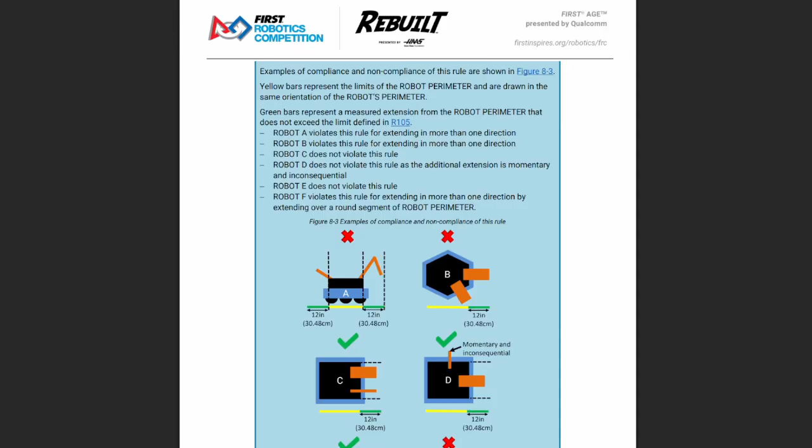Blue box. Examples of momentary and inconsequential actions include a wire or cable tie swinging out of the robot perimeter, including while an extension is deployed out a different side. Examples of compliance and non-compliance of this rule are shown in Figure 8-3. Yellow bars represent the limits of the robot perimeter and are drawn in the same orientation of the robot's perimeter. Green bars represent a measured extension from the robot perimeter that does not exceed the limits defined in R105.

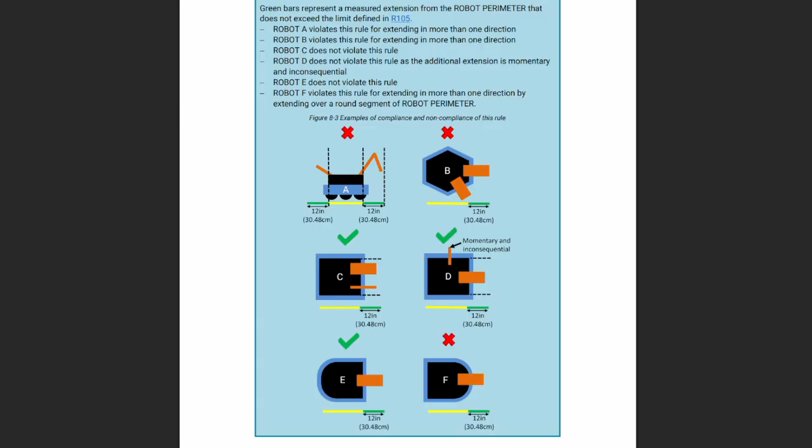Robot A violates this rule for extending in more than one direction. Robot B violates this rule for extending in more than one direction. Robot C does not violate this rule. Robot D does not violate this rule as the additional extension is momentary and inconsequential. Robot E does not violate this rule. Robot F violates this rule for extending in more than one direction by extending over a round segment of robot perimeter.

R107. Robot vertical extension limit. Robots may not extend such that their total height exceeds 30 inches. Blue box. This measurement is intended to be made as if the robot is resting on a flat floor without changing the robot configuration, not relative to the current height of the robot from the field carpet at any given time, i.e., the measurement is made perpendicular to the robot perimeter polygon.

R108. Robot extension floor interaction. Robot extensions may not interact with the carpet, bumps, or tower base such that the bumpers are lifted out of the bumper zone. See R405.

8.2. Robot safety and damage prevention. R201: No digging into carpet.

Traction devices must not have surface features that could damage the arena, e.g. metal, sandpaper, inflexible studs, cleats, hook loop fasteners, or similar attachments. Traction devices include all parts of the robot designed to transmit any propulsive and/or braking forces between the robot and field carpet.

R202: No exposed sharp edges. Protrusions from the robot and exposed surfaces shall not pose hazard to the arena elements, including scoring elements or people. Note that acrylic or other materials which may break into jagged pieces is not explicitly prohibited, but any such breakage must be corrected immediately to comply with this rule.

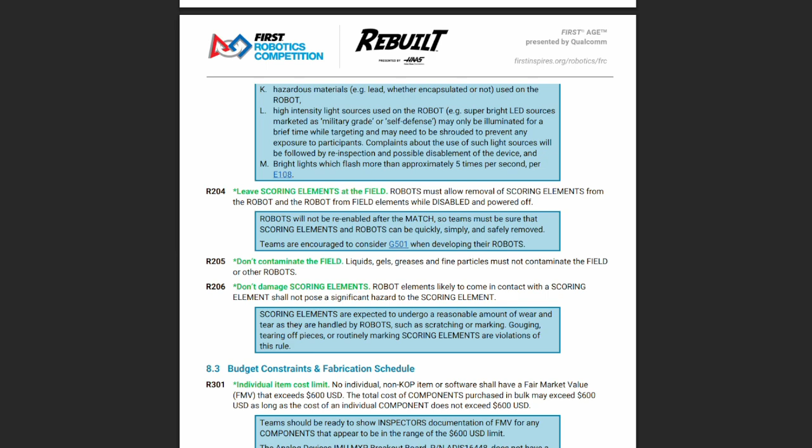R206: Don't damage scoring elements. Robot elements likely to come in contact with a scoring element shall not pose a significant hazard to the scoring element. Scoring elements are expected to undergo a reasonable amount of wear and tear as they are handled by robots, such as scratching or marking. Gouging, tearing off pieces, or routinely marking scoring elements are violations of this rule.

8.3. Budget constraints and fabrication schedule. R301: Individual item cost limit.

No individual, non-KOP item or software shall have a fair market value (FMV) that exceeds $600 US. The total cost of components purchased in bulk may exceed $600 US as long as the cost of an individual component does not exceed $600 USD.

Teams should be ready to show inspectors documentation of fair market value for any components that appear to be in the range of the $600 USD limit. The Analog Devices IMU MXP Breakout Board, part number ADIS 16448, does not have a published fair market value. This device is considered to comply with this rule regardless of its true fair market value.

The FMV, or fair market value, of a COTS item is its price defined by a vendor for the part or an identical functional replacement. This price must be generally available to all FIRST Robotics Competition teams throughout the build and competition season, i.e., short-term sale prices or coupons do not reflect FMV.

However, teams are only expected to make a good faith effort at determining the item price and are not expected to monitor prices of robot items throughout the season. The FMV is the cost of the item itself and does not include any duties, tariffs, taxes, shipping, or other costs that may vary by locality.

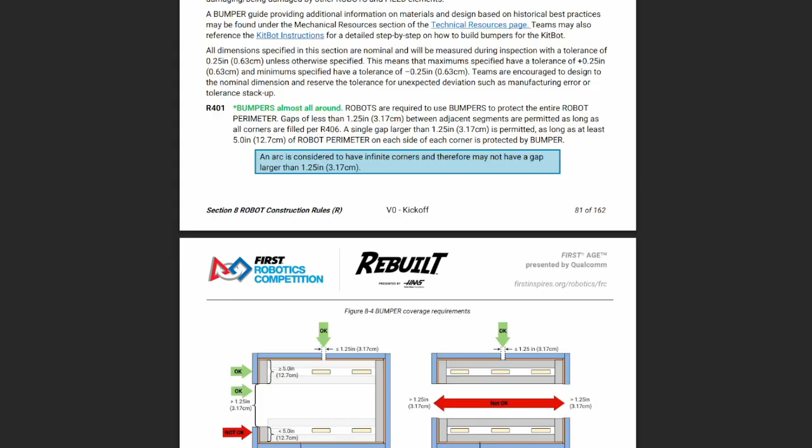An arc is considered to have infinite corners, and therefore it may not have a gap larger than 1.25 inches.

R402: bumper construction. Bumpers must consist of the following. A. Padding: a minimum of 2.25 inches depth of foam padding, at least 4.5 inches tall, consisting of solid blocks, sheets, or stacked rods of one or more of the following materials: solid pool noodles or backer rod; solid polyethylene closed-cell foam, including cross-linked, with density between 1.5 and 3 pounds per cubic foot; solid EVA closed-cell foam with density between 2 and 6 pounds per cubic foot; and foam floor tiles. Multiple types, shapes, and/or layers of foam may be used within a single bumper.

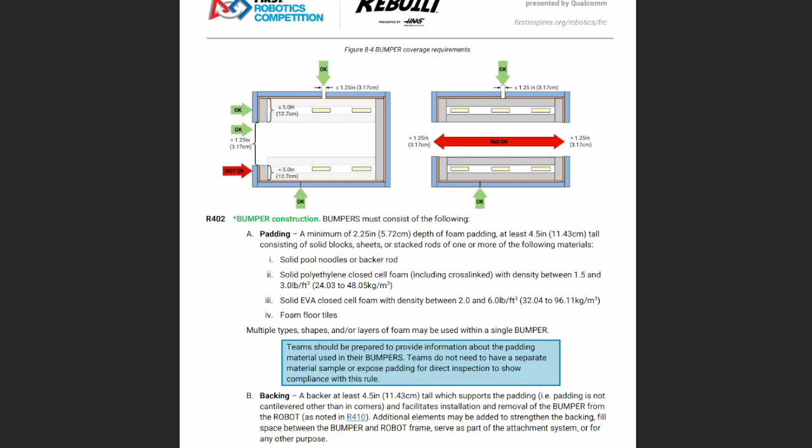Teams should be prepared to provide information about the padding material used in their bumpers. Teams do not need to have a separate material sample or expose padding for direct inspection to show compliance with this rule.

B. Backing: a backer at least 4.5 inches tall, which supports the padding, i.e. the padding is not cantilevered other than in corners, and facilitates installation and removal of the bumper from the robot, as noted in R410. Additional elements may be added to strengthen the backing, fill space between the bumper and robot frame, serve as part of the attachment system, or for any other purpose.

C. Cover cloth, as noted in R411, covers all outward, upward, and downward facing surfaces of padding such that no padding is exposed to interaction with the field or other robots.

D. Fastening system. Bumpers must attach to the robot perimeter with a rigid fastening system to form a tight, robust connection to the main structure or frame, e.g. not attached with hook and loop tape or cable ties. The fastening system must be designed to withstand vigorous gameplay. All removable fasteners, e.g. bolts, locking pins, quick-release pins, etc., may be considered part of either the bumpers or robot for determination of weight per R103 and R408.

Blue box. The bumper rules provide teams significant freedom in choosing designs and materials. For information on reference designs, see the bumper guide under the Mechanical Resources section of the Technical Resources page.

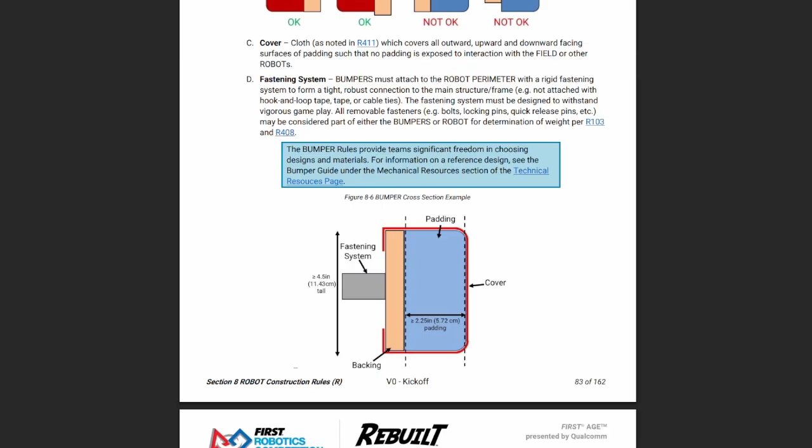R403, Bumper Extension Limit. Bumpers must not extend more than 4 inches from the robot perimeter.

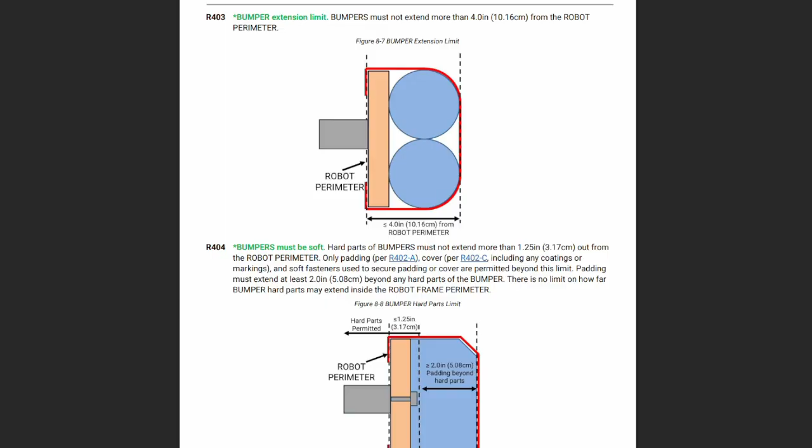R404, bumpers must be soft. Hard parts of bumpers must not extend more than 1 1/4 inches out from the robot perimeter. Only padding per R402A, cover per R402C, including any coatings or markings, and soft fasteners used to secure padding or cover are permitted beyond this limit. Padding must extend at least 2 inches beyond any hard parts of the bumper. There is no limit on how far bumper hard parts may extend inside the robot frame perimeter.

Blue box. Hard parts include any items which are likely to cause damage to the cloth or padding of other bumpers, such as nuts and bolts, cable ties, hard plastic, etc.

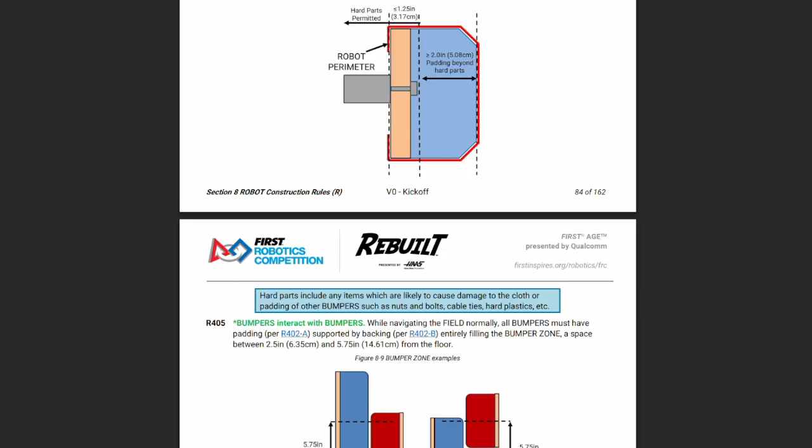R405. Bumpers interact with bumpers. While navigating the field normally, all bumpers must have padding per R402A, supported by backing per R402B, entirely filling the bumper zone, a space between 2.5 inches and 5.75 inches from the floor.

Blue box. This measurement is intended to be made in a robot's expected configuration or configurations while navigating the field and is relative to whatever surface the robot is currently driving on. Bumpers leaving the bumper zone due to robots inadvertently tipping is not a violation of this rule.

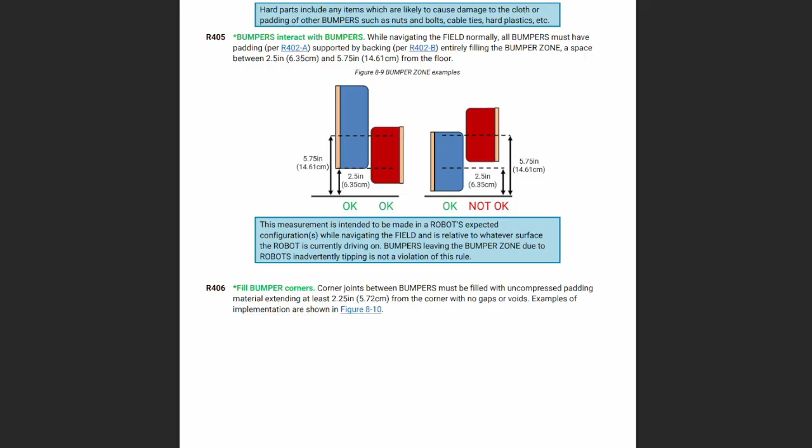R406. Fill bumper corners. Corner joints between bumpers must be filled with uncompressed padding material extending at least 2.25 inches from the corner with no gaps or voids. Examples of implementation are shown in Figure 8-10.

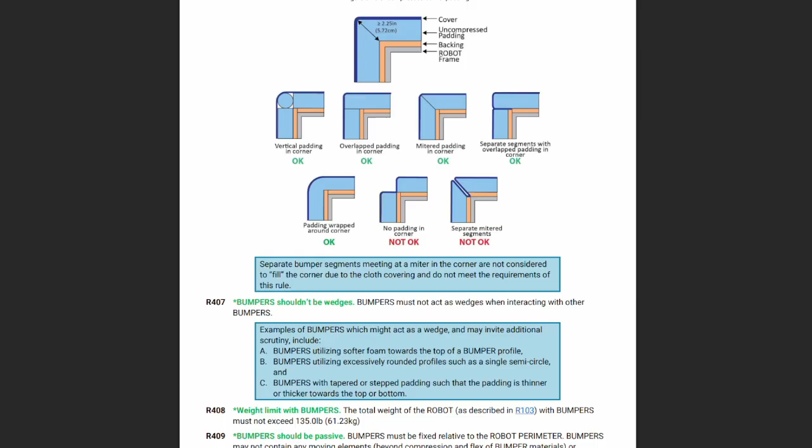Figure 8.10, uncompressed corner padding wrapped around corner, OK. Blue box. Separate bumper segments meeting at a miter in the corner are not considered to fill the corner due to the cloth covering and do not meet the requirements of this rule.

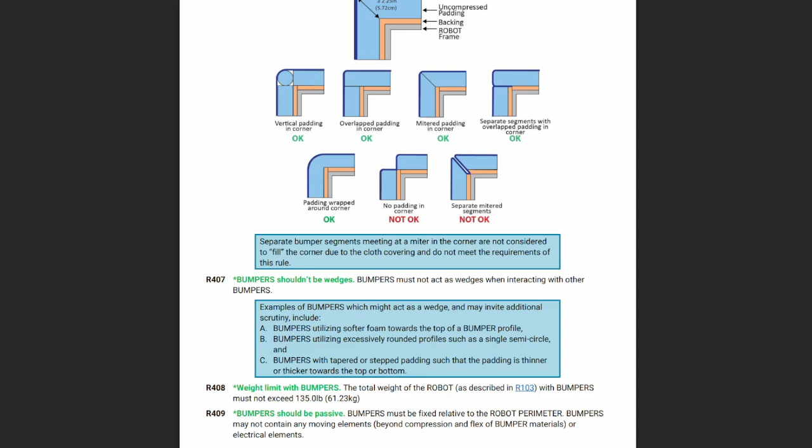R407. Bumpers shouldn't be wedges. Bumpers must not act as wedges when interacting with other bumpers. Blue box. Examples of bumpers which might act as a wedge and may invite additional scrutiny include: A. Bumpers utilizing softer foam towards the top of a bumper profile. B. Bumpers utilizing excessively rounded profiles such as a single semicircle. And C. Bumpers with tapered or stepped padding such that the padding is thinner or thicker towards the top or bottom.

R408. Weight limit with bumpers. The total weight of the robot as described in R103 with bumpers must not exceed 135 pounds.

R409. Bumpers should be passive. Bumpers must be fixed relative to the robot perimeter. Bumpers may not contain any moving elements beyond compression and flex of bumper materials or electrical elements.

R410. Bumpers must come off. Bumpers must be designed for installation and removal to facilitate inspection and weighing. Blue box. As a guideline, bumpers should be able to be installed or removed by 2 people in fewer than 5 minutes.

R411. Bumpers indicate your alliance. Each robot must be able to display red or blue bumper covers to reflect their alliance color as assigned in the match schedule distributed at the event, as described in Section 10.1, Match Schedules.

Contrasting markings on outward, upward, or downward facing surfaces of the bumper cover other than the following are prohibited: A. Those required per R412. B. Hook and loop tape, snap fasteners, or functional equivalents backed by the hard parts of the bumper. C. Solid white FIRST logos between 4.75 inches and 5.25 inches wide, comparable to those available in the rebuilt virtual kit. And D. Narrow areas of underlying cloth exposed at seams, corners, or folds.

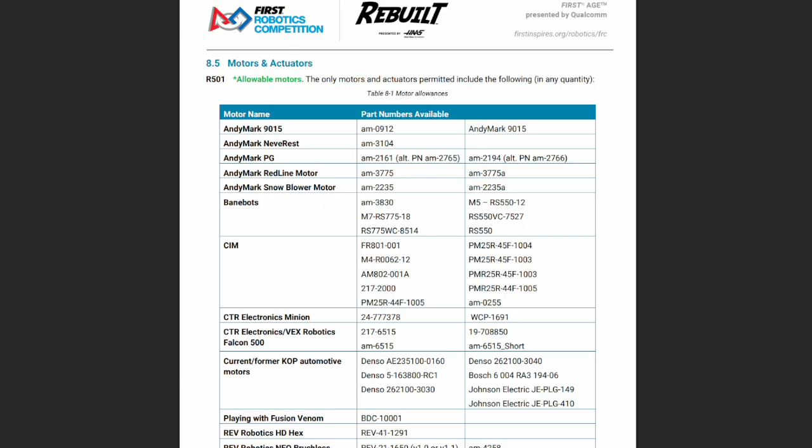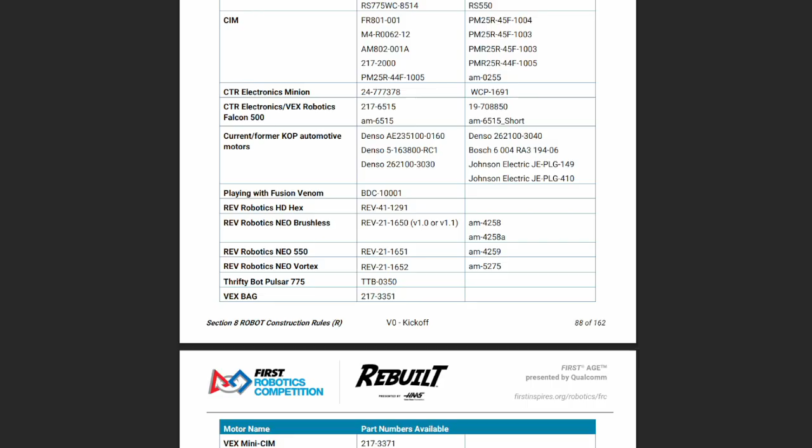AndyMark 9015, Neverest, PG, Redline motor, and Snowblower motor. Banebots 775, RS 550, etc., CIM and a number of variants, CTR Electronics Minion, CTR Electronics / Vex Robotics Falcon 500, current / former kit of parts automotive motors, Playing with Fusion Venom, Rev Robotics HD Hex, Rev Robotics Neo Brushless, Rev Neo 550, Neo Vortex, Thrifty Bot Pulsar 775, Vex Bag, Vex Mini-CIM, WCP Kraken X44, Kraken X60, RS775 Pro.

Fans no greater than 120 millimeters nominal size, rated electrical input power no greater than 10 watts, continuous duty at 12 volts. Hard drive motors, part of a legal COTS computing device, factory installed vibration, and autofocus motors resident in COTS computing devices, e.g. rumble motor in a smartphone.

PWM COTS rotational servos with stall current less than or equal to 4 amps and mechanical output power of less than or equal to 8 watts at 6 volts. PWM COTS linear servos with max stall current less than or equal to 1 amp at 6 volts. Motor integral to a COTS sensor, e.g. LiDAR, scanning, sonar, etc., provided the device is not modified except to facilitate mounting. 1. Compressor compliant with R806 and used to compress air for the robot's pneumatic system.

COTS brushed motors, linear actuators, electrical solenoid actuators, or electromagnets rated for 12 volts and wired to an approved power regulating device downstream of a breaker, 20 amps or less. Electrical solenoid actuators or electromagnets used at 24 volts must be rated to 24 volts.

Blue box: for servos, note that the RoboRio is limited to a max current output of 2.2 amps on the 6-volt rail, 12.4 watts of electrical input power. Teams should make sure that their total servo power usage remains below this limit at all times. Servo mechanical output power is approximated by the following formula using 6-volt data reported by manufacturer: mechanical output power in watts is equal to 0.25 times stall torque in newton meters times no load speed in radians per second.

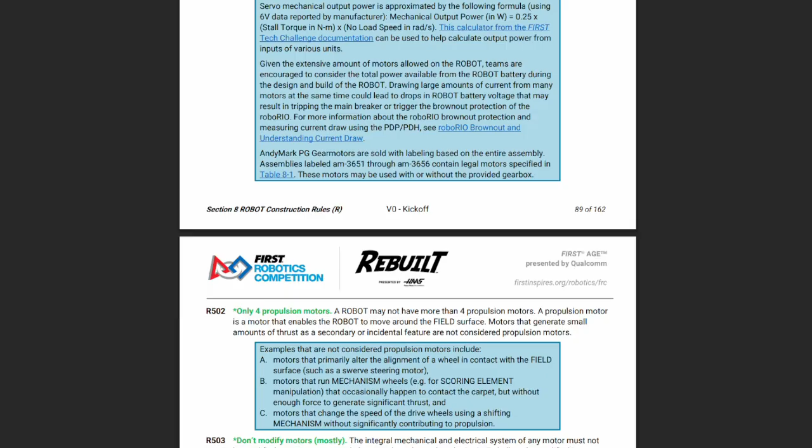AndyMark PG gearmotors are sold with labeling based on the entire assembly. Assemblies labeled AM3651 through AM3656 contain legal motors specified in Table 8-1. These motors may be used with or without the provided gearbox.

R502: only 4 propulsion motors. A robot may not have more than 4 propulsion motors. A propulsion motor is a motor that enables the robot to move around the field surface. Motors that generate small amounts of thrust as a secondary or incidental feature are not considered propulsion motors.

Examples that are not considered propulsion motors include: A. Motors that primarily alter the alignment of a wheel in contact with the field surface, such as a swerve steering motor. B. Motors that run mechanism wheels, e.g., for scoring element manipulation, that occasionally happen to contact the carpet but without enough force to generate significant thrust. And C. Motors that change the speed of the drive wheels using a shifting mechanism without significantly contributing to propulsion.

R503: don't modify motors, mostly. The integral mechanical and electrical system of any motor must not be modified. Motors, servos, and electrical solenoids used on the robot shall not be modified in any way except as follows. A. The mounting brackets and/or output shaft interface may be modified to facilitate the physical connection of the motor to the robot and actuated part.

B. The electrical leads may be trimmed to length as necessary, and connectors or splices to additional wiring may be added. C. The locking pins on the window motor, part number 262-100-3030 and 262-100-3040, may be removed.

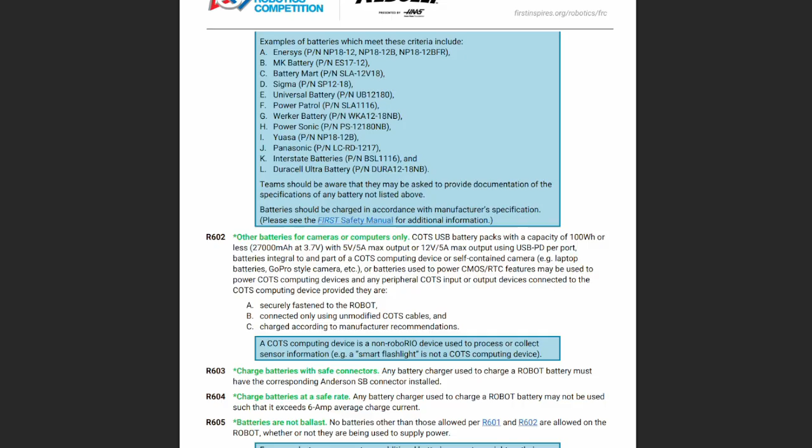Nut and bolt style refers to any style battery terminal where the connector is secured to the battery using a threaded fastener. Examples of batteries which meet these criteria include Enersys, MK Battery, Battery Mart, Sigma, Universal Battery, Power Patrol, Werker Battery, Power Sonic, Yuasa, Panasonic, Interstate Batteries, Duracell Ultra Battery. Teams should be aware that they may be asked to provide documentation of the specifications of any battery not listed above. Batteries should be charged in accordance with manufacturer specifications. Please see the FIRST safety manual for additional information.

R602: other batteries for cameras or computers only. COTS USB battery packs with a capacity of 100 watt-hours or less, with 5 volt/5 amp max output, or 12 volt 5 amp max output using USB PD per port.

Batteries integral to and part of COTS computing devices, or self-contained cameras, e.g. laptop batteries, GoPro-style cameras, etc., or batteries used to power CMOS/RTC features may be used to power COTS computing devices and any peripheral COTS input or output device connected to the COTS computing device provided they are A. securely fastened to the robot, B. connected only using unmodified COTS cables, and C. charged according to manufacturer recommendations.

Blue box. A COTS computing device is a non-RoboRIO device used to process or collect sensor information. E.g., a smart flashlight is not a COTS computing device. R603. Charge batteries with safe connectors. Any battery charger used to charge a robot battery must have the corresponding Anderson SB connector installed.

R604. Charge batteries at a safe rate. Any battery charger used to charge a robot battery may not be used such that it exceeds 6 amps average charge current. R605. Batteries are not ballast. No batteries other than those allowed per R601 and R602 are allowed on the robot, whether or not they are being used to supply power. Blue box. For example, teams may not use additional batteries as extra weight on their robots.

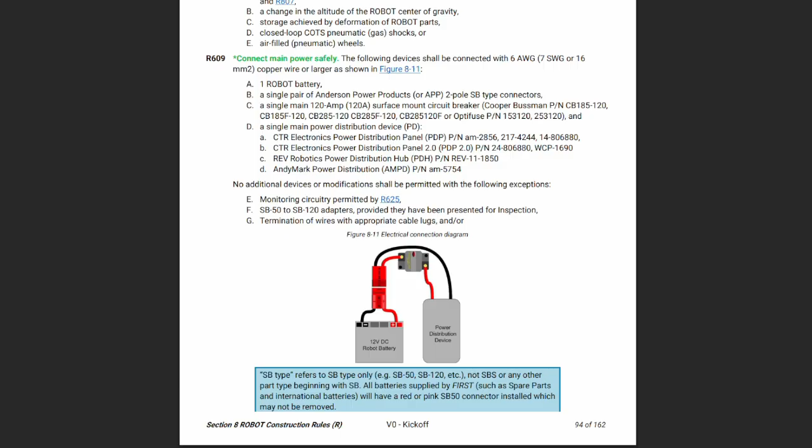Blue box. SB type refers to SB type only, e.g. SB50, SB120, etc., not SBS or any other part type beginning with SB. All batteries supplied by FIRST, such as spare parts and international batteries, will have a red or pink SB50 connector installed, which may not be removed. The pink connector included in the kit of parts mates with the red SB50 connector. While pure copper wire is recommended, copper-clad aluminum wire is considered copper wire.

R610. One breaker/fuse per circuit. All circuits, with the exception of those listed in R615 and R617, must connect to and have power sourced solely by a single protected connector pair of the PD. Circuits must not connect to the main power input of the PD. R611. The robot frame is not a wire. All wiring and electrical devices shall be electrically isolated from the robot frame. The robot frame must not be used to carry electrical current.

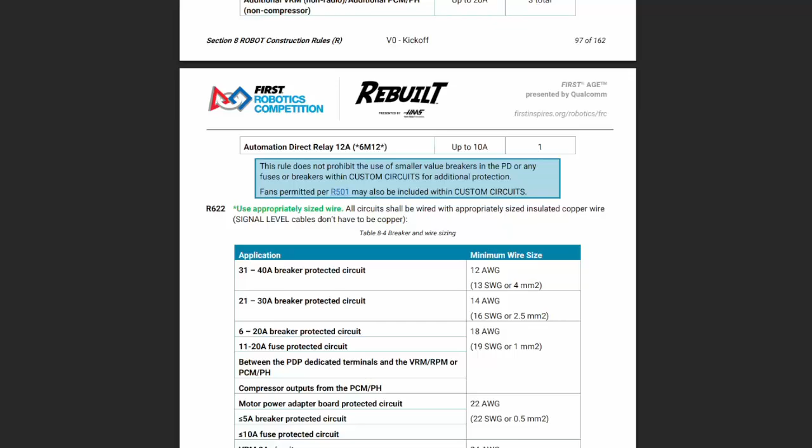Additional VRM, non-radio/additional PCM/PH non-compressor up to 20 amp breaker, 3 allowed per breaker. Automation Direct relay 12 amp, up to 10 amp breaker, only one allowed per breaker.

Blue box. This rule does not prohibit the use of smaller value breakers in the PD or any fuses or breakers within custom circuits for additional protection. Fans permitted per R501 may also be included within custom circuits. R622. Use appropriately sized wire. All circuits shall be wired with appropriately sized insulated copper wire. Signal level cables don't have to be copper.

For a 31 to 40 amp breaker, requires 12 AWG minimum. 21 to 30 amp breaker protected circuits require 14 AWG wire or larger. 6 to 20 amp breaker protected circuits, 11 to 20 amp fuse protected circuits, and between the PDP dedicated terminals and the VRM/RPM or PCM/PH and compressor outputs from the PCM/PH require 18 AWG or larger.

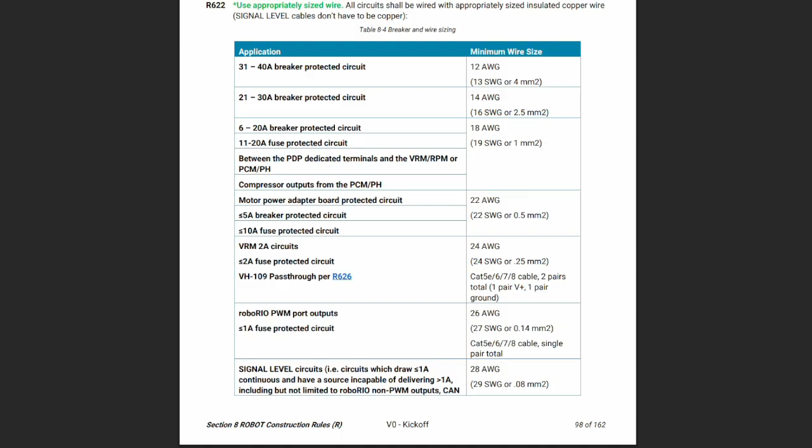Motor power adapter board protected circuits and less than or equal to 5 amp breaker protected circuits or less than or equal to 10 amp fuse protected circuits require 22 AWG or larger. VRM 2 amp circuits, less than or equal to 2 amp fuse protected circuits and VH 109 pass through per R626 require 24 AWG wire or larger.

roboRIO PWM port outputs or less than or equal to 1 amp fuse protected circuits require 26 AWG or larger. Signal level circuits, i.e. circuits which draw less than or equal to 1 amp continuous and have a source incapable of delivering greater than 1 amp, including but not limited to roboRIO non-PWM outputs, CAN signals, PCM/PH solenoid outputs, VRM 500 milliamp outputs, RPM outputs, and Arduino outputs require 28 AWG or larger.

Wires that are recommended by the device manufacturer or originally attached to legal devices are considered part of the device and by default legal. Such wires are exempt from this rule, provided they are powered by the smallest value fuse or breaker which permits proper device operation.

Blue box. In order to show compliance with these rules, teams should use wire with clearly labeled sizes if possible. If unlabeled wiring is used, teams should be prepared to demonstrate that the wire used meets the requirements of this rule, e.g., wire samples and evidence that they are the required size. While pure copper wire is recommended, copper-clad aluminum wire is considered copper wire.

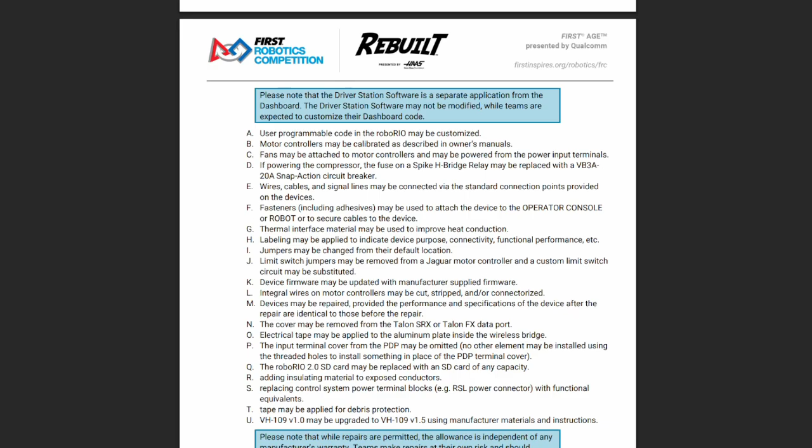Blue box. Please note that the driver station software is a separate application from the dashboard. The driver station software may not be modified, while teams are expected to customize their dashboard code. A. User programmable code in the RoboRio may be customized. B. Motor controllers may be calibrated as described in owner's manuals. C. Fans may be attached to motor controllers and may be powered from the power input terminals. D. If powering the compressor, the fuse on a spike H-bridge relay may be replaced with a VB3A-20 amp snap action circuit breaker.

E. Wires, cables, and signal lines may be connected via the standard connection points provided on the devices. F. Fasteners, including adhesives, may be used to attach the device to the operator console or robot, or to secure cables to the device. G. Thermal interface material may be used to improve heat conduction. H. Labeling may be applied to indicate device purpose, connectivity, functional performance, etc. I. Jumpers may be changed from their default location. J. Limit switch jumpers may be removed from a Jaguar motor controller, and a custom limit switch circuit may be substituted.

K. Device firmware may be updated with manufacturer-supplied firmware. L. Integral wires on motor controllers may be cut, stripped, and/or connectorized. M. Devices may be repaired, provided the performance and specifications of the device after the repair are identical to those before the repair. N. The cover may be removed from the Talon SRX or Talon FX data port. O. Electrical tape may be applied to the aluminum plate inside the wireless bridge. P. The input terminal cover from the PDP may be omitted. No other element may be installed using the threaded holes to install something in place of the PDP terminal cover.

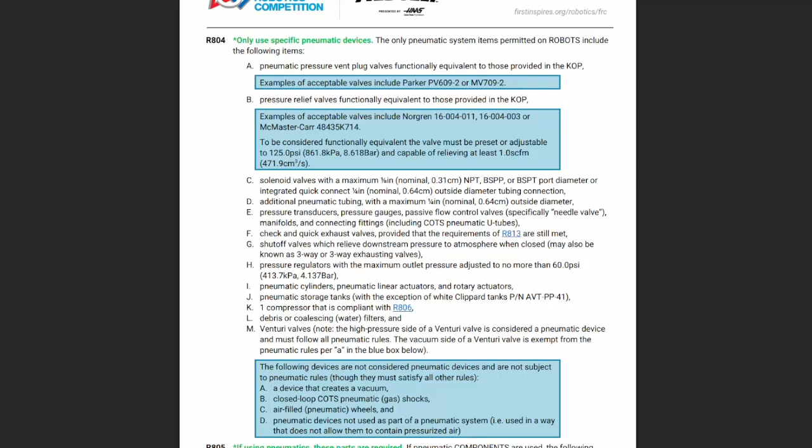R804: Only use specific pneumatic devices. The only pneumatic system items permitted on robots include the following: A, pneumatic pressure vent plug valves, functionally equivalent to those provided in the kit of parts.

Blue box: examples of acceptable valves include Parker PV609-2 or MV709-2. B, pressure relief valves, functionally equivalent to those provided in the kit of parts.

Blue box: examples of acceptable valves include Norgren 16-004-011, 16-004-003, or McMaster-Carr 48435K714. To be considered functionally equivalent, the valve must be preset or adjustable to 125 psi and capable of relieving at least one SCFM.

C. Solenoid valves with a maximum 1/8-inch nominal NPT, BSPP, or BSPT port diameter, or integrated quick connect 1/4-inch outside diameter tubing connection. D. Additional pneumatic tubing with a maximum 1/4-inch outside diameter. E. Pressure transducers, pressure gauges, passive flow control valves, specifically needle valves, manifolds, and connecting fittings, including COTS pneumatic U-tubes.

F. Check and quick exhaust valves, provided the requirements of R813 are still met. G. Shutoff valves, which relieve downstream pressure to atmosphere when closed, may also be known as three-way or three-way exhausting valves. H. Pressure regulators with the maximum outlet pressure adjusted to no more than 60 psi. I. Pneumatic cylinders, pneumatic linear actuators, and rotary actuators.

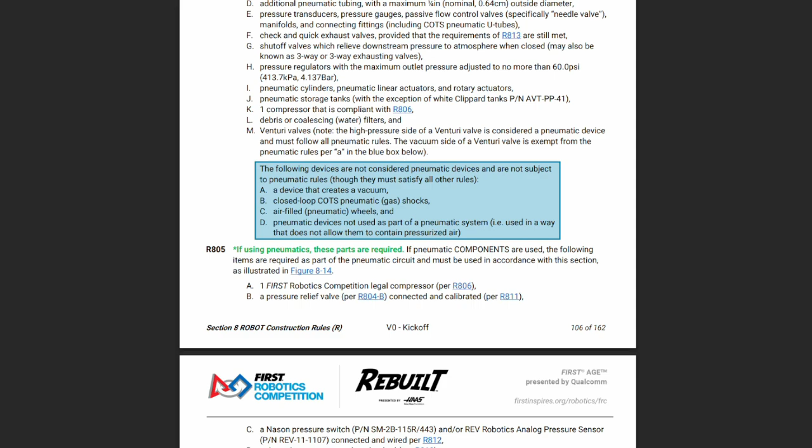R805. If using pneumatics, these parts are required. If pneumatic components are used, the following items are required as part of the pneumatic circuit and must be used in accordance with this section, as illustrated in Figure 8-14.

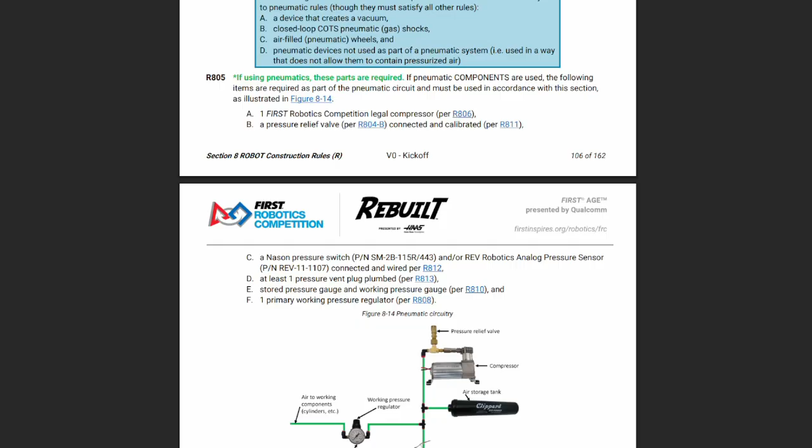A. One First Robotics Competition legal compressor per R806. B. A pressure relief valve per R804-B, connected and calibrated per R811. C. A Nason pressure switch, part number given, and/or REV Robotics analog pressure sensor, part number given, connected and wired per R812. D. At least one pressure vent plug plumbed per R813.

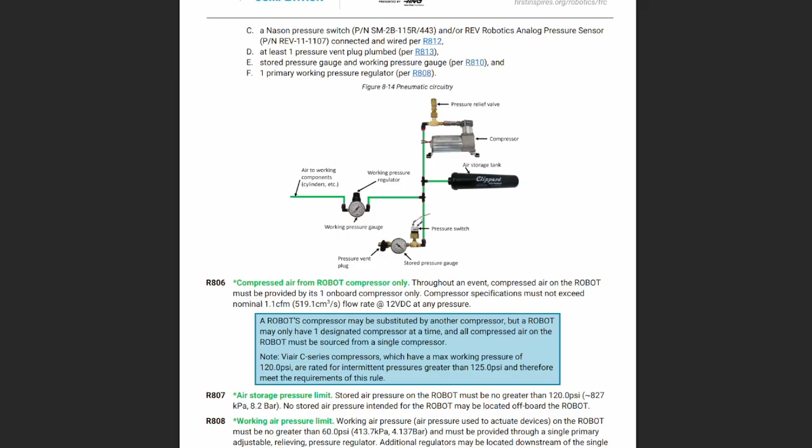E. Stored pressure gauge and working pressure gauge per R810. And F. One primary working pressure regulator per R808. Figure 8-14, pneumatic circuitry, shows relief valve, compressor, storage tanks, etc.

R806, compressed air from robot compressor only. Throughout an event, compressed air on the robot must be provided by its one onboard compressor only. Compressor specifications must not exceed nominal 1.1 cubic feet per minute flow rate at 12 volt DC at any pressure.

Blue box: A robot's compressor may be substituted by another compressor, but a robot may only have one designated compressor at a time, and all compressed air on the robot must be sourced from a single compressor. Note: Viair C-Series compressors, which have a maximum working pressure of 120 psi, are rated for intermittent pressures greater than 125 psi and therefore meet the requirements of this rule.

R807, Air Storage Pressure Limit. Stored air pressure on the robot must be no greater than 120 psi. No stored air pressure intended for the robot may be located off-board the robot.

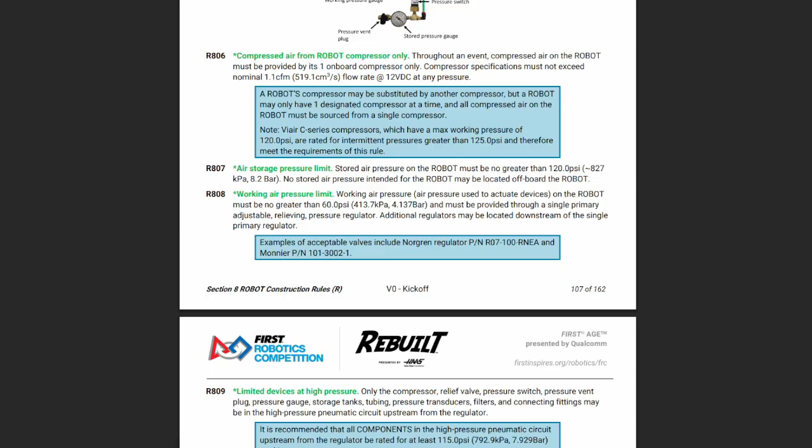R808, Working Air Pressure Limit. Working air pressure used to actuate devices on the robot must be no greater than 60 psi and must be provided through a single primary adjustable relieving pressure regulator. Additional regulators may be located downstream of the single primary regulator.

Blue box: Examples of acceptable valves include Norgren regulator part number R07-100-RNEA and Monnier part number 101-3002-1.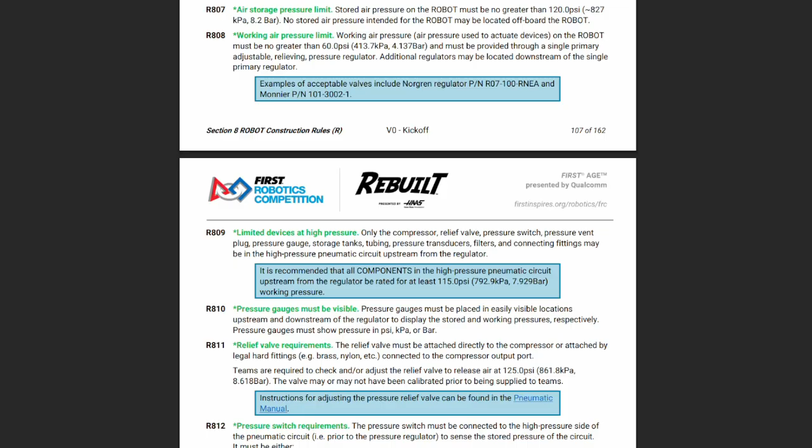R809, Limited devices at high pressure. Only the compressor, relief valve, pressure switch, pressure vent plug, pressure gauge, storage tanks, tubing, pressure transducers, filters, and connecting fittings may be in the high-pressure pneumatic circuit upstream from the regulator.

Blue box: It is recommended that all components in the high-pressure pneumatic circuit upstream from the regulator be rated for at least 115 psi.

R810. Pressure gauges must be visible. Pressure gauges must be placed in easily visible locations upstream and downstream of the regulator to display the stored and working pressures, respectively. Pressure gauges must show pressure in psi, kPa, or bar.

R811. Relief valve requirements. The relief valve must be attached directly to the compressor or attached by legal hard fittings, e.g. brass, nylon, etc., connected to the compressor output port. Teams are required to check and/or adjust the relief valve to release air at 125 psi.

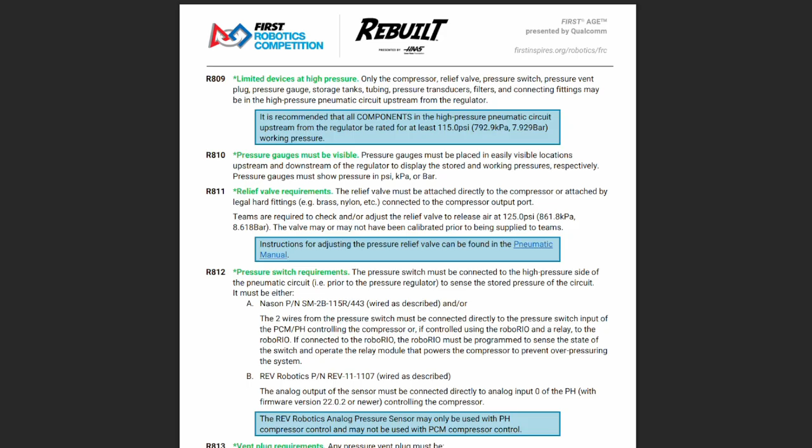The valve may or may not have been calibrated prior to being supplied to teams. Blue box: Instructions for adjusting the pressure relief valve can be found in the Pneumatic Manual.

R812, pressure switch requirements. The pressure switch must be connected to the high pressure side of the pneumatic circuit, prior to the pressure regulator, to sense the stored pressure of the circuit. It must be either A, Nason part number SM-2B-115R/443 wired as described, with the two wires connected directly to the pressure switch input of the PCM or PH controlling the compressor, or if controlled using the Robo-Rio and a relay, to the Robo-Rio. If connected to the Robo-Rio, it must be programmed to sense the state of the switch and operate the relay module that powers the compressor to prevent overpressuring the system.

B, Rev Robotics part number Rev-11-1107 wired as described. The analog output of the sensor must be connected directly to analog input 0 of the PH with firmware version 22.0.2 or newer, controlling the compressor. Blue box: the Rev Robotics analog pressure sensor may only be used with PH compressor control and may not be used with PCM compressor control.

R813, vent plug requirements. Any pressure vent plug must be A, connected to the pneumatic circuit such that, when manually operated, it will vent to the atmosphere to relieve all stored pressure in a reasonable amount of time, and B, placed on the robot so that it is visible and easily accessible.

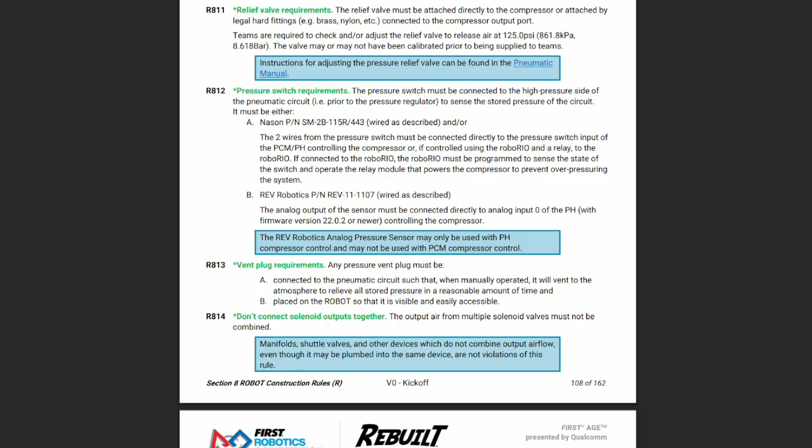R814, don't connect solenoid outputs together. The output air from multiple solenoid valves must not be combined. Blue box: manifolds, shuttle valves, and other devices which do not combine output airflow, even though it may be plumbed into the same device, are not violations of this rule.

8.9, operator console. R901, use the specified driver station software. The driver station software provided by National Instruments is the only application permitted to specify and communicate with the operating mode, i.e. auto/teleop, and operating state, enabled/disabled, to the robot. The driver station software must be version 26.0 or newer. Blue box: teams are permitted to use a portable computing device of their choice, laptop, computer, tablet, etc., to host the driver station software while participating in matches.

R902, the operator console must have a visible display. The operator console, the set of components and mechanisms used by the drivers and/or human players to relay commands to the robot, must include a graphical display to present the driver station software diagnostic information. It must be positioned within the operator console so that the screen display can be clearly seen during inspection and in a match.

R903, connect FMS Ethernet directly to the operator console. Devices hosting the driver station software must only interface with the FMS via the Ethernet cable provided at the driver station, e.g. not through a switch. Teams may connect the FMS Ethernet cable to the device running the driver station software directly via an Ethernet pigtail, or with a single port Ethernet converter, e.g. docking station, USB Ethernet converter, Thunderbolt Ethernet converter, etc. The Ethernet port on the operator console must be easily and quickly accessible.